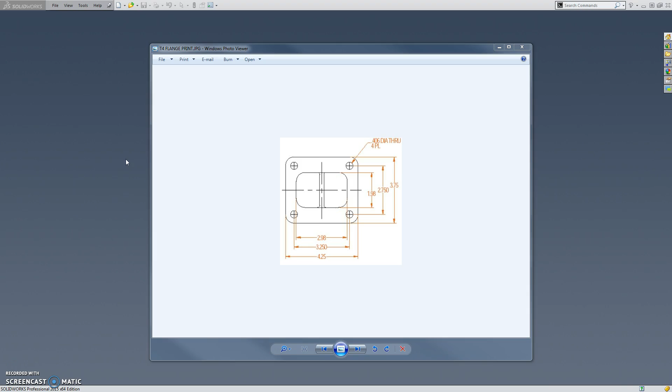So let me move this to the side, and let's go ahead and get started. This tutorial we're going to be covering things like sketching squares, adding sketch fillets, smart dimensioning, sketch relationships, extrusions, and working with the hole wizard.

So to get started, we're going to go ahead and create a new part. We're going to go to File, New, Add a Part, and we're going to extrude a boss from the front plane, and we're going to do it with center rectangles. And we're just going to go ahead and randomly draw two.

You'll see that they're blue, and the reason is because they are not fully defined, so that means I can grab a point and just kind of drag it around. Remember, all your sketching, especially unless you're doing surfacing or other things like that, should be fully defined. So let's add in a couple dimensions here.

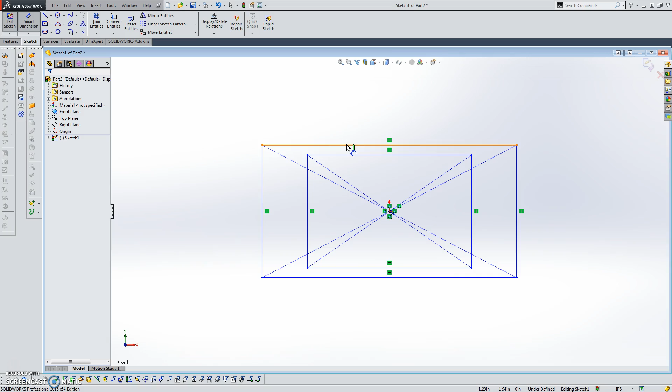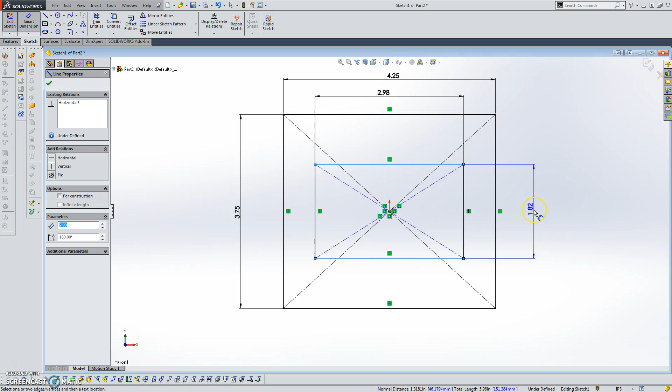So we know the width of this guy, it's going to be 4.25. Height is 3.75. The width of this internal port is 2.98. The height of it is 1.98.

There you go. You can see that all my lines are now black, which means I can no longer grab things and move them around.

Let's add in a couple fillets. For this outside fillet, we're going to click on all four corners. We're going to change the fillet parameter to a 1/2 inch, and then hit OK. We're going to do a second set of fillets on the inside, and that one is going to be 0.375.

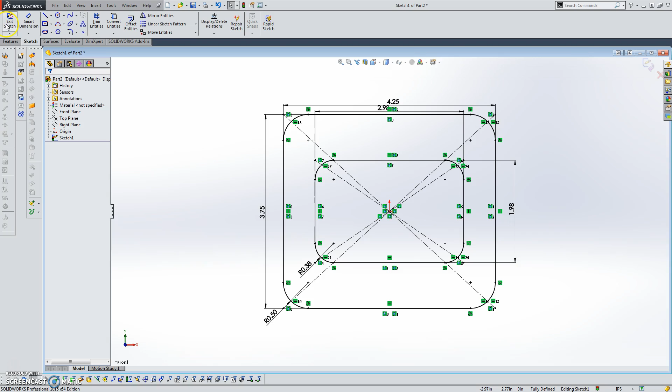And there we go, we've got our basic outline of our T4 flange. So we're going to hit OK there, and then exit the sketch, and that's going to pop up the boss extrude menu.

For this one, we're just going to extrude it blindly, and we're going to extrude it to a 1/2 inch. And there we have our basic flange. So now we just need to add in some holes for mounting.

We're going to click on Hole Wizard, and then we want to make sure that we are doing the hole selection. For the standard, we want to be doing ANSI inch. If you click on it, you can see ANSI metric, BSI, DIN, all sorts of other standards, but for this one we're just going to do ANSI inch. And we're going to do a screw clearance.

For a T4 flange, they use 3/8 inch bolts, and we're going to do loose fittings. The end condition, you can go blind, but because we want this to go all the way through the flange, in all instances it'll just be through all.

Now we click on the position tab, and I'm just going to roughly click on this face, and I'm going to click 4 times in each corner, and hit OK. Hit escape - I accidentally added a coincident relationship, which I don't actually want.

So now that we have our 4 holes in there, what I do like doing is working with relationships with hole patterns. That way if things change, if you do them correctly, you can get things to auto-update. And this is where parametric modeling comes into play.

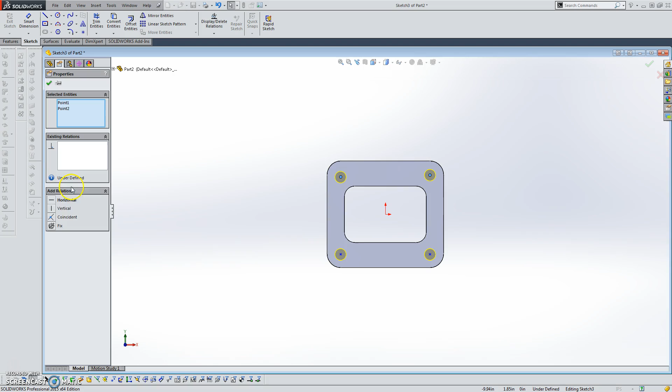So I'm going to add horizontal relationships to these top pieces. I'm going to add vertical relationships to the left side, vertical relationships to the right side. And now when I grab these, you can see that the other points will move with respect to the point that I have grabbed.

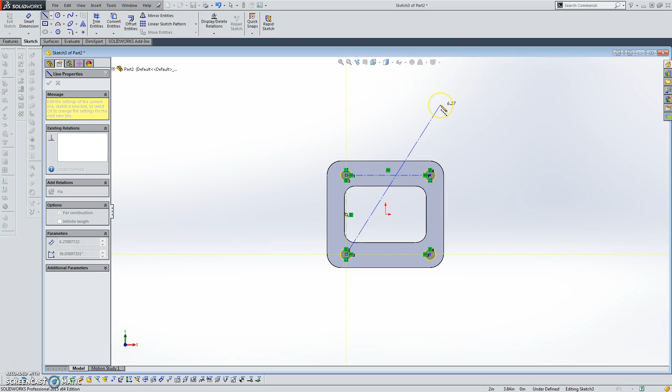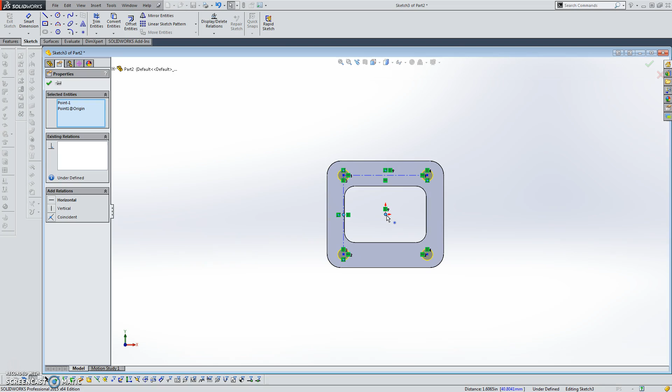So let's add in a couple more references, and what we want to reference is around that origin. To do that, I just draw 2 construction lines, right click this top line, select midpoint, hold Control and then click on the origin and add a vertical relation. Right click, select midpoint, Control, add a horizontal relationship with the origin.

And now as you see, as I grab these points around, they will expand and contract around the origin of the flange.

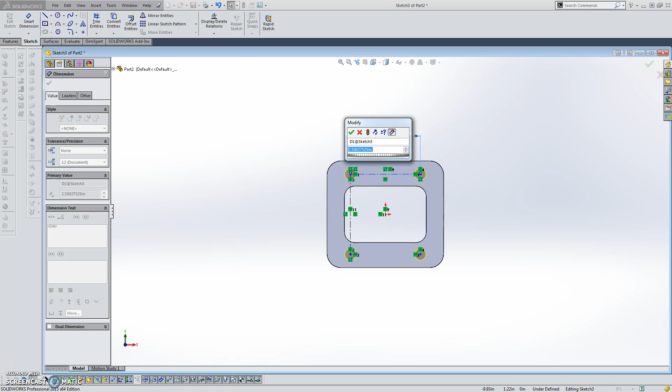Let's add in a couple dimensions. So this one is 3.25 inches, and that one is going to be 2.75. Hit OK, click on the green check mark to close out the hole wizard.

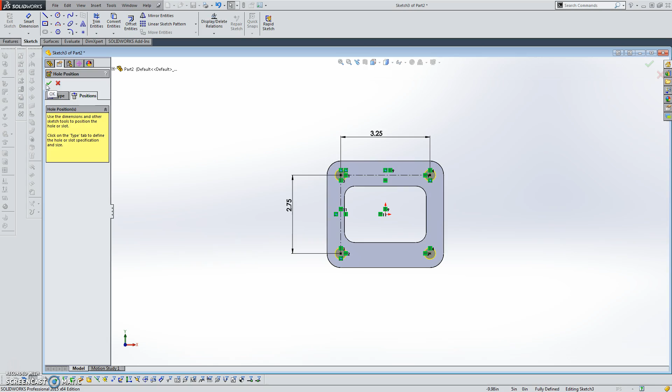And we have produced the first flange.